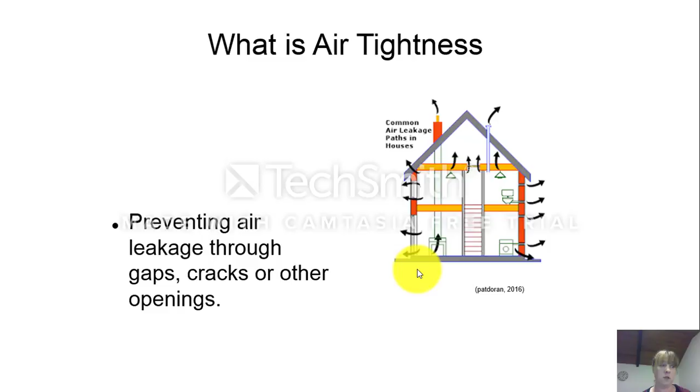Now, the need for an airtight envelope was first recognised in Sweden in 1966. The effects of air leakage include surface condensation, damaging decorations and enabling mould growth, the deterioration of building fabric caused by condensation, and for the occupant of the house, there's discomfort caused by drafts and cold coming in, and cold rooms.

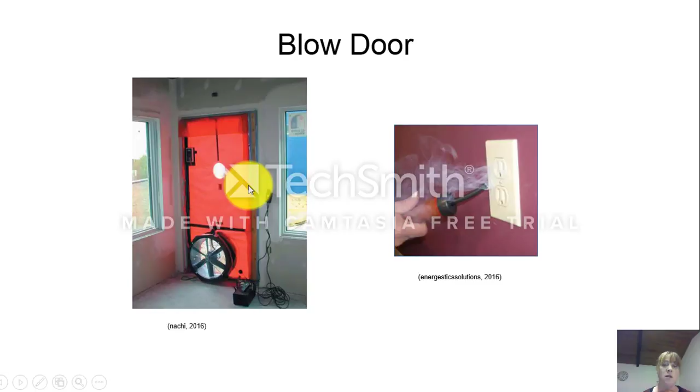Now, this here is the blower door that they would use for air tightness testing. As you can see, they place it on the door. It's completely airtight here. They have a fan which sucks all the air out of the building. Before they start the blower door tester, the person who's doing the testing will go around. They'll check all windows are closed throughout the house, and anything visual they can see that creates drafts, they will seal that up, so it gives a more accurate result.

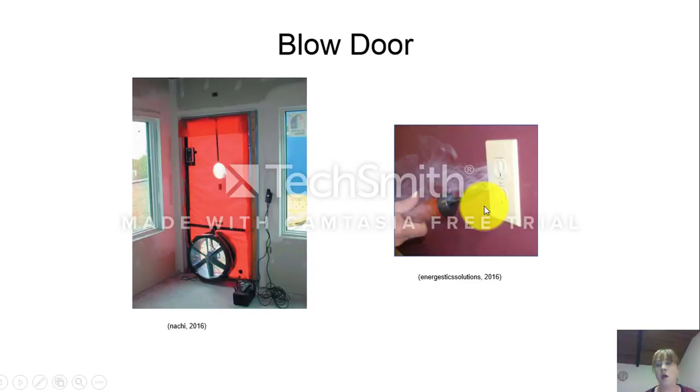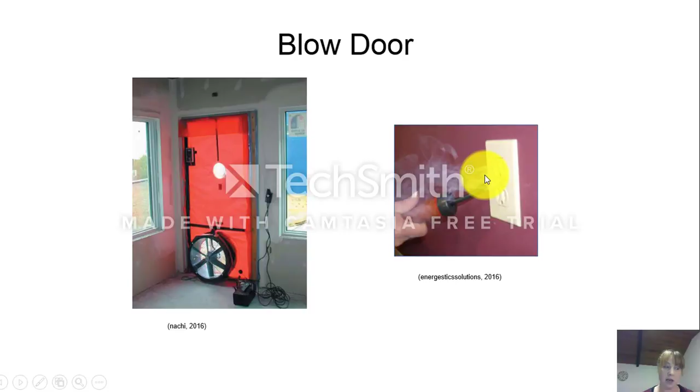They'll start the blower door tester. It sucks all the air out. They will go around then with a machine that creates smoke, and as you can see here, if they're running the blower door tester, there's a draft coming in from around the electrical sockets. So this tells them this has to be sealed up in order to make the house airtight.

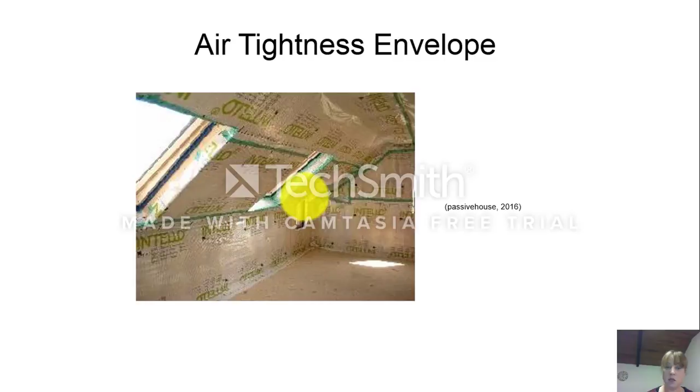This here is an outer envelope of a building, making it airtight. This is the special membrane and it's got special tape here. After all this is installed, plasterboard is attached on top of this. Air tightness testing is a relatively new service. There are not many people qualified in the country at present to carry out air testing.

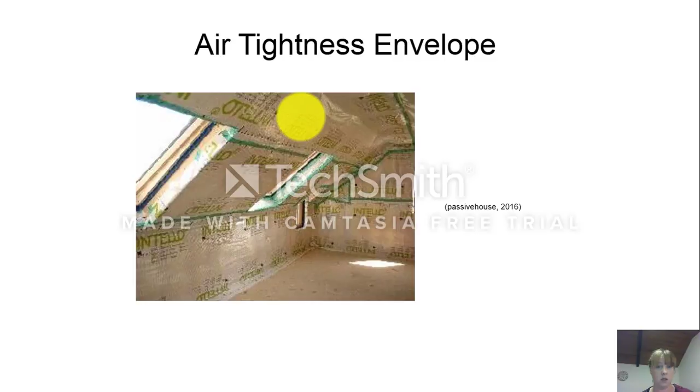There are very few testers in Westmeath where John is based, which would indicate that it's a good time to be getting into it in Westmeath and surrounding areas. The Conservation of Fuel and Energy Dwellings building regulations were revised in 2011 and are documented under Part L of the Technical Guidance document. The European passive house regulations are tighter in order to increase levels of energy efficiency. If Ireland continues to follow European passive house regulations, there will be a higher demand for testers in the country.

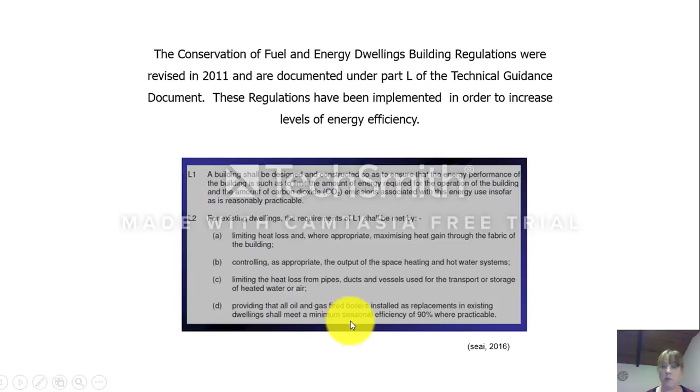Here you can see, this is where the regulations were. They first came into law in 2007, but they were revised in 2011. And you can see here the requirements of L1 shall be met by limiting heat loss and, where appropriate, maximising heat gain through the fabric of the building, controlling as appropriate the output of the space heating and hot water systems, limiting the heat loss from pipes, ducts and vessels used for the transport or storage of heated water or air, and also providing that all oil and gas fired boilers installed as replacements in existing dwellings shall meet a minimum seasonal efficiency of 90% where practicable.

At present there is a shortage of housing in the area, so I'll go through the SWOT analysis. The strengths are: John owns his own blower door tester. He has years of experience in airtight testing. It is now mandatory for all dwellings. It will increase the house price for the owner when selling. The dwelling is less expensive to heat and more comfortable to live in. It maintains the structure and prevents against mould and condensation. It reduces the carbon footprint of the build.

Lack of housing in the country and promises of the government of increased building is a strength. The government announced in January 2016 there is a grant available for first-time buyers up to 10,000 to get the property market moving. Now, a weakness of airtight testing is people's lack of understanding of and being unaware of the service. So people need to be educated, and this will come with time. The cost for the homeowners is also a weakness, because airtightness is not visible in the building, so it may appear expensive to the homeowner, because once you have, as we've seen earlier, the airtightness envelope in the house, plasterboard goes over that. So if you don't understand exactly what it entails, it doesn't look like a lot of work has been done.

Now, opportunities are, it's a relatively new service and there aren't many qualified or registered testers in the country at the minute. And another opportunity is running seminars and courses on air tightness; he believes homeowners who do self-builds would be very interested in learning about air tightness. Threats: testers can be undercut by unregistered testers, and a slump in the housing market would obviously be a threat to this service.

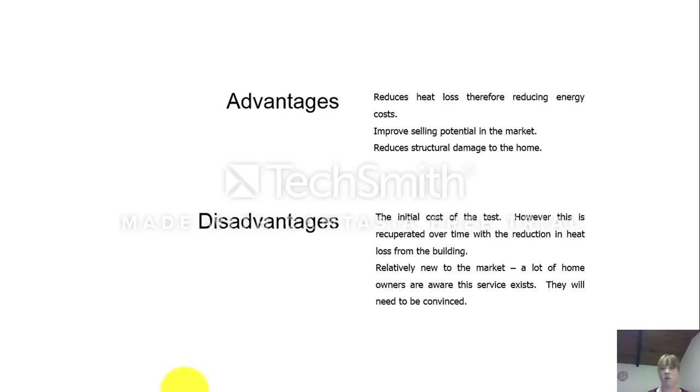Now, the advantages are: it reduces heat loss, therefore reducing energy costs. It improves selling potential in the market and reduces structural damage to the home. And as I said in the SWOT analysis, the initial cost of the test is a disadvantage, but I suppose it is recuperated over time with a reduction in heat loss from the building. And another disadvantage is it's relatively new to the market, and as I've mentioned already, people are unaware of this service.

Now, at present there is a shortage of houses in Ireland. The target market is all new homeowners and builders within a reasonable driving distance from John's office. This would include the counties of Westmeath, Meath, Longford and County and City of Dublin. All builders and DIY homeowners are obliged by law to comply with the new regulations with regard to energy efficient standards. There is a shortage of housing in Ireland at present. According to employers group IBEC, Ireland needs between 35,000 and 40,000 new homes each year, and that was published in the journal in 2016.

Now, the financial projections. The cash flow will be funded by 10,000 of John's own money and 10,000 of a bank loan. In the first year of operations, he projects the business will achieve sales of €24,400 excluding VAT, and a net profit of €3,180 after deducting drawings. Profit and a 3,000 bank overdraft facility will fund ongoing cash flow requirements. In conclusion, from this business plan, considering John's experience, new regulations, and the expected increase in house builds, this new service will prove to be successful.